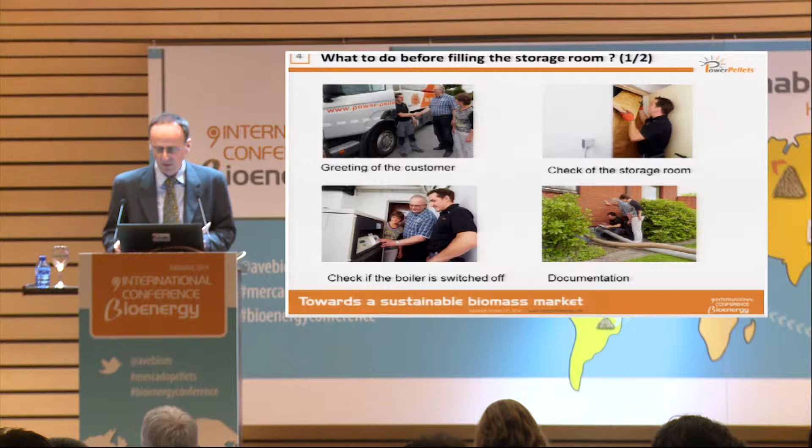For documentation, we have a checklist. A checklist is also in the handbook, the EN Plus handbook, but we have to add some other points, also safety points, so that he checks if there are ventilated caps - the truck driver can also sell ventilated caps. He looks if a sticker is on the storage room, and if he needs to enter the storage room, he has a CO warner on his telephone.

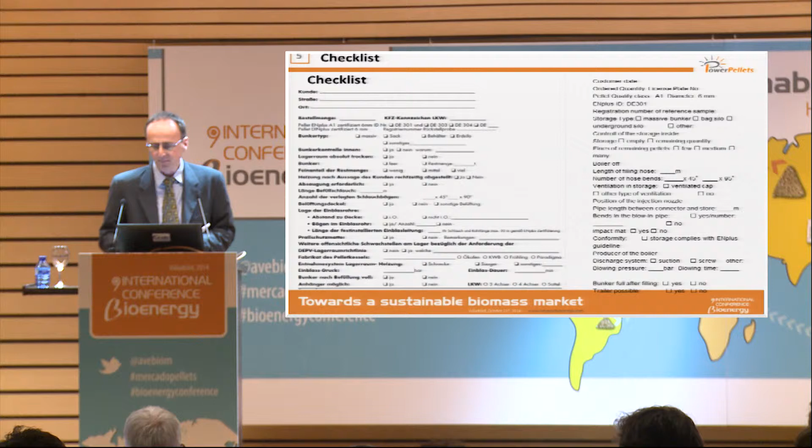We continue with the picture story: 2 tubes and 1 plug socket for the vacuum fan, needs to be 60 ampere. It's also important that the client gets some explanation of what starts, and then the blowing process, the individual blowing process, because every storage at the end client is different.

You get a lot of surprises there, so the driver needs to decide what conveying air, how much conveying air he's using, how much pressure he puts on the silo truck, and what mass flow he has, so that he gets a good result, a good quality inside the storage room. So the driver needs experience and, of course, training, and that's why we do experiments.

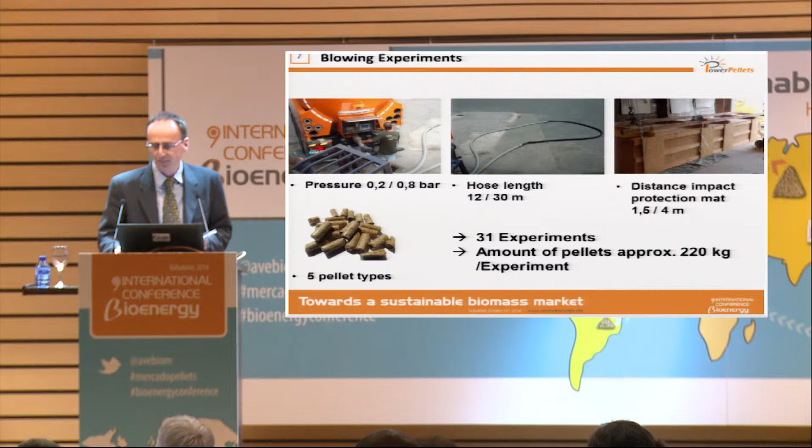And of course, we need to measure the pellets afterwards. If you see, 1 ton is around 1 to 1.5 million pellets. So we measure 7 million pellets before the blowing-in process and afterwards, so that we know exactly what the process of blowing in does to destroy the pellets and how many fines you get.

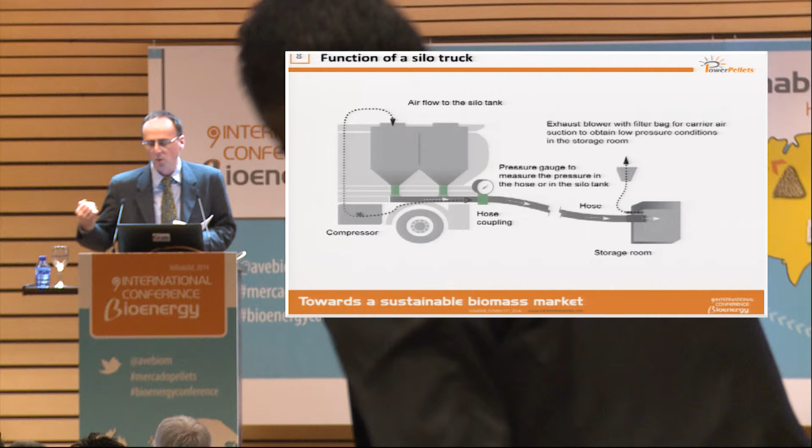Some words on what happens on the silo truck. You have the compressor air going onto the silo and onto the carrier, or the conveying air directly into the tube. The driver decides how much he gives to the silo and how much directly into the tube. Then you measure the pressure and the mass flow.

Imagine this quadrat you see is the storage room of the end client. If we have overpressure of 0.1 bar, then you get 1 ton per meter quadrat. So it's very important that the driver and you as a trader know what happened with the truck in this blowing-in process, that you get no overpressure in the pellet storage, because then you get complaints for sure from the end client if one wall is moved or the whole cellar has fines.

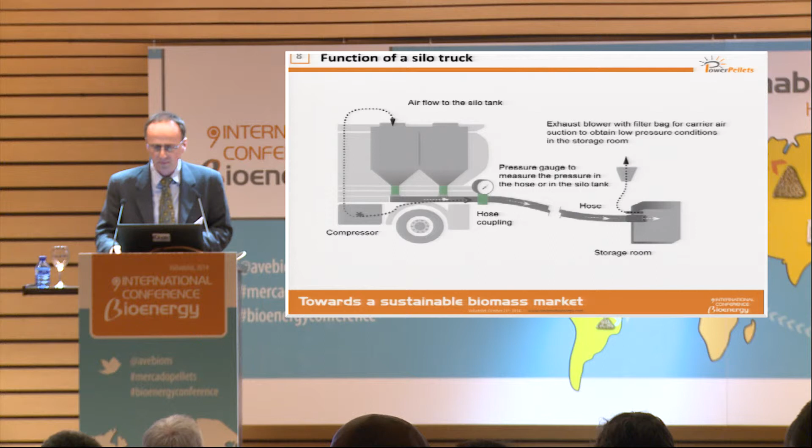We installed this technique at our trucks, and now we have installed it at 4 trucks, but in the next years we will install it in all trucks.

We measure the compressor air, the flow rate, the air flow rate at the compressor, at the conveying air, and calculate the silo air. This is not normal - normally you see at the silo truck only the pressure, but you don't see the air flow.

We measure the pressure in the silo of the truck, and we are recording the weight. The weighing system is connected with the system, so you get it directly compared with the flow rate and the pressure. This data is sent from every client to a web-based server, and some hours later we get the result. This is very good for training truck drivers.

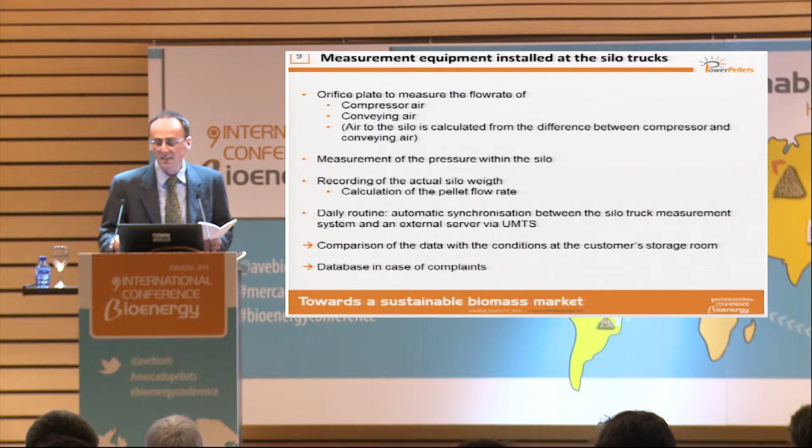And of course, if there is a complaint, we can look inside and see what the driver had done, if it's our fault or the fault of the constructor of the storage.

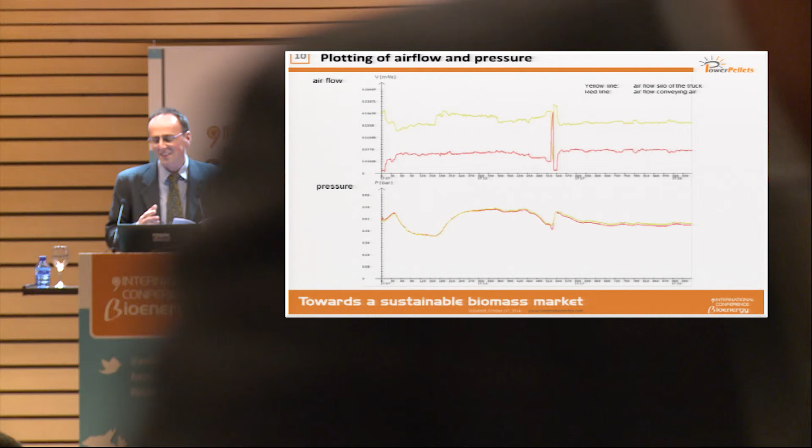For example here, the airflow - you can see peaks where the truck driver tried to move the pellets when they were nearly blocked in the tube, giving some extra air inside. So it's crystal clear what the driver had done, and also the pressure you see directly compared with the airflow.

This has results on safety. For example, if you heat up the pellets with hot air, you get more outgassing of the pellets. You also see the maintenance condition of the truck, the filter at the compressor - if the filter is nearly blocked, then the temperature goes up too.

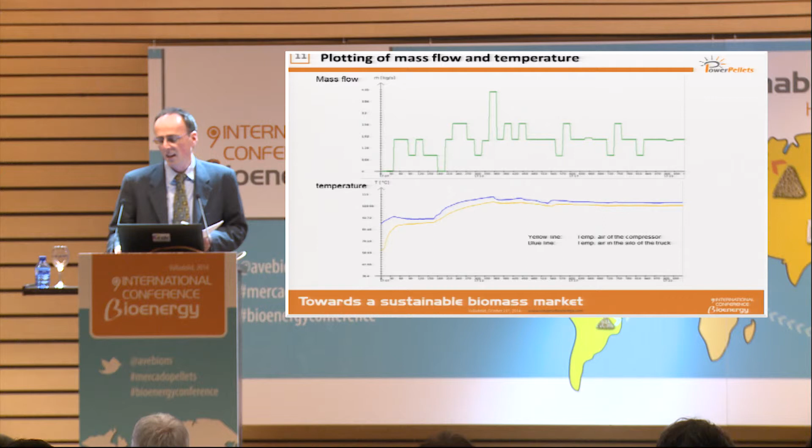In Germany last summer, I think we lost 3 trucks because they burnt, and probably it was the filter. So the temperature of the air is quite important, and you need to pay attention to it.

I'm coming back because now we have the 2 puzzle pieces together. We have the possibility to measure what happened with the blowing in at the truck, and we measured the pellets. So if you look here at the 5 pellet qualities...

The colored part shows what the length is, shorter afterwards. At the ENplus pellets, the first sort, the length was 16 millimeters before and 15 millimeters afterwards. You can also see at the industry pellets, 8 millimeter and industry 6 millimeters - especially the 8 millimeters were already quite short, but they got even shorter.

But if you look at the fines, with a high airflow and a 12-meter length of tube and 4 meters distance of the protection mat, you get quite high fines because with high airflow you blow in the pellets quite aggressively.

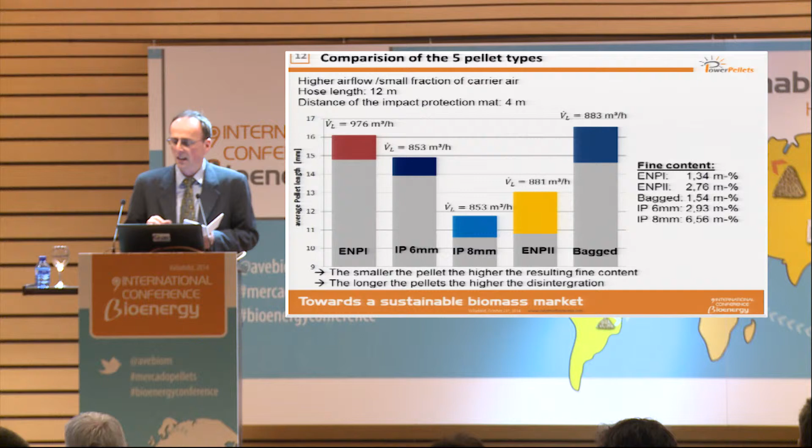So we get fines mainly from the small pellets, because they were already short and break easily. But the long pellets, like the bagged pellet, break in the middle, so you get more shorter pellets but not so much fines.

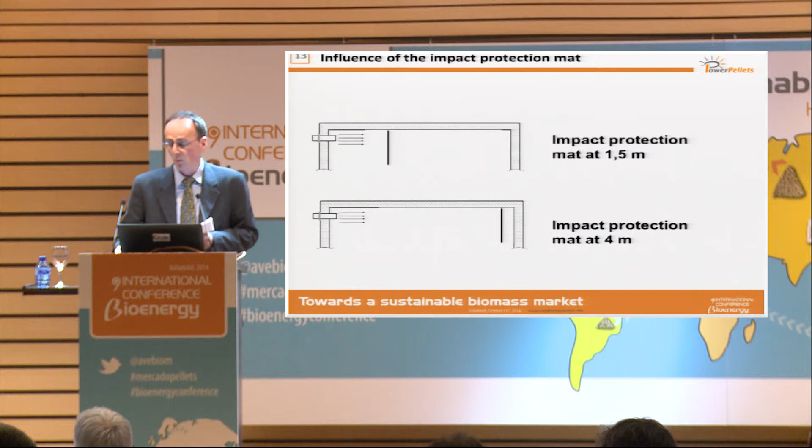A second experiment was about the influence of the protection mat into the storage - one time at 1.5 meter distance and one time at 4 meter distance. And here you see something curious.

The line without the dots is the initial line, the pellet length before. You see the maximum or the median of the pellets was before 16 millimeters. After blowing in and measuring, we get at a mat distance of 1.5 meters...

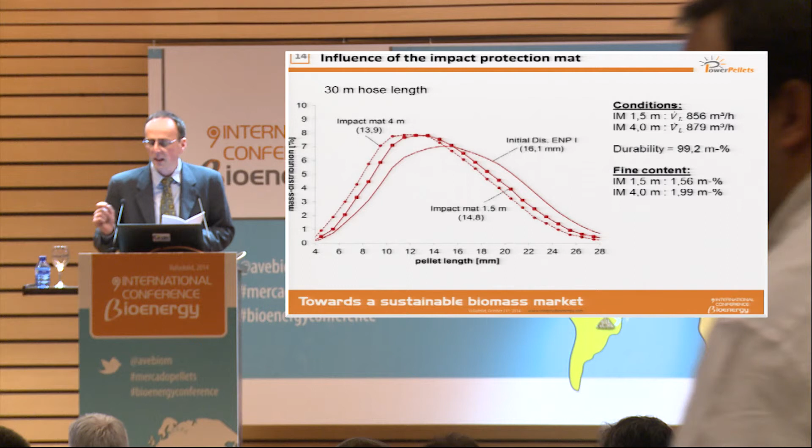That line was not total. Yeah, you will show it. And we have there 14.8 millimeter length, but the pellets with the wide distance protection mat have only 13.9 millimeter.

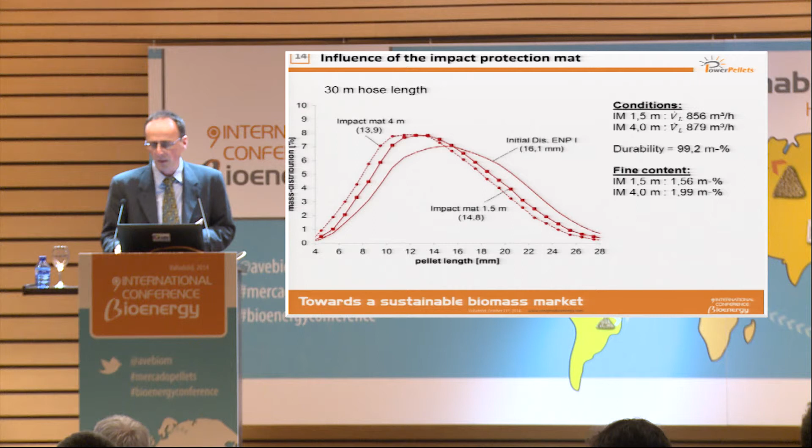And this is not only one example with the 30 meter hose, it was general that the fines with the 4 meter mat were higher and the pellets were more short by this process at the 4 meter impact mat. That sounds not logical.

Our theory is that because we had a block of pellets inside our storage, because we lift up the storage to recharge the pellets quite fast, the mat with the 1.5 meter distance can move to the back. So the pellets are sliding in, compared to the protection mat at 4 meters, which can only move a few centimeters. So it seems that the sliding effect is quite good for the pellets.

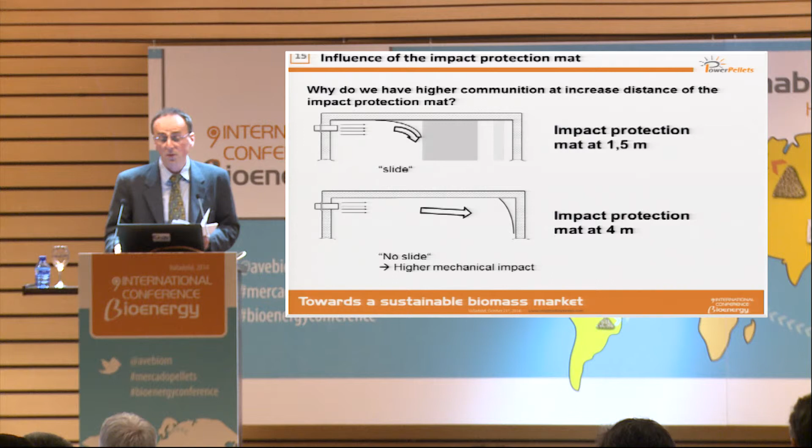Also, it's important that you have tubes with an inner surface which is coated, which is slippy, so that the pellets aren't destroyed by the tube.

About the ground connection, I could speak for half an hour, but I only want to say it's important that you have the ground connection from the truck to the silo, the storage room of the client, and therefore you need to connect the copper wire of the tube to the connectors and so on, so that you have this ground effect.

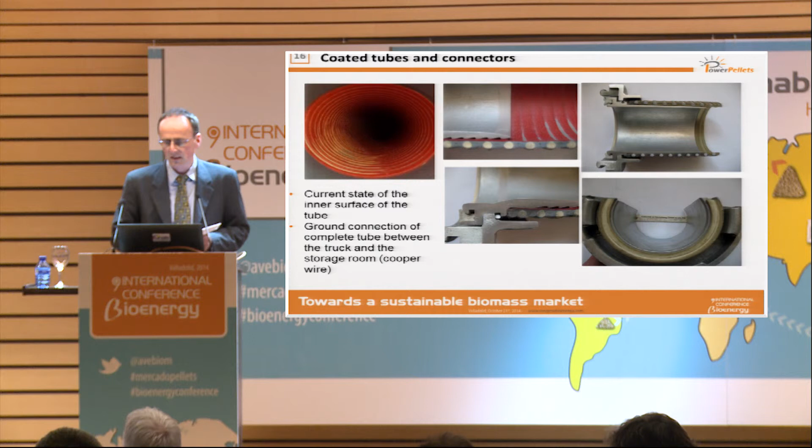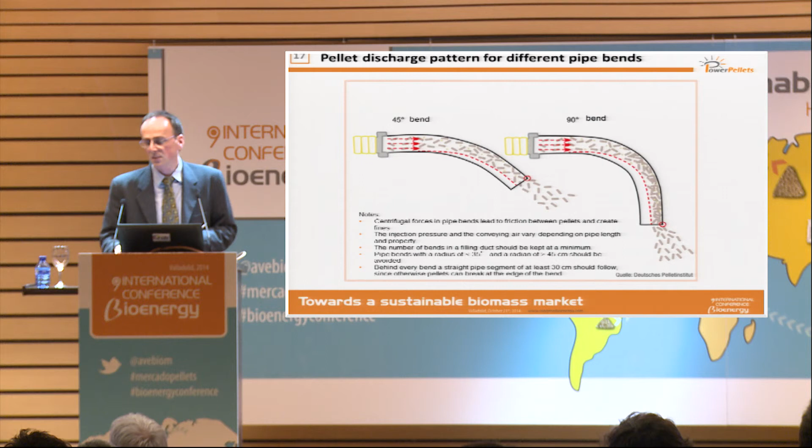And also there, it's not so good if you have connector edges where you get fines. If you look more closely at a bend, you see the pellets going through the outside, so you have friction between pellets and pellets, and pellets and the metal bend. If you have only this bend and no straight part of tube at the end, you get an edge where pellets are destroyed. So you need a straight part of tube behind this little red circle, so the pellets can move through the whole diameter of the tube and aren't destroyed by the edge at the end of the bend.

What we also see is the movement of fines. The fines separate to the lower part, and the pellets discharge like an hourglass.

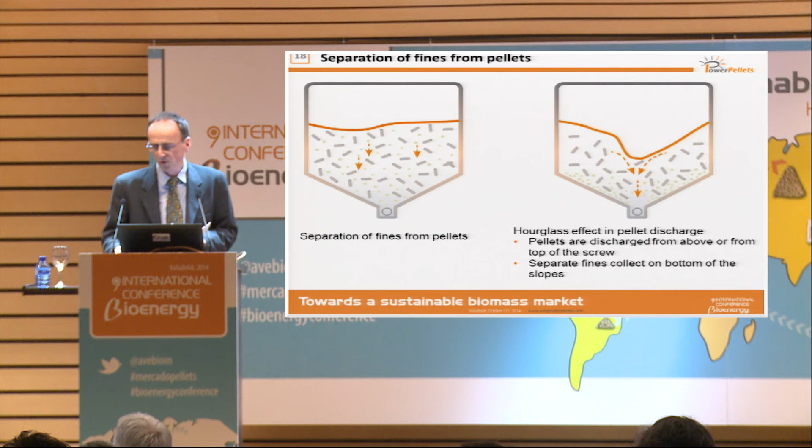And I put here a film. I hope I can start the film. Look on the upper two rows. No, it's not working. Perhaps you start and I say stop. Perhaps you see me? No? You have the same. Thank you.

And there you can see that people think if they get new pellets, the older pellets are discharged. This is not true. If you have 2 tons of pellets in a storage room and buy 4 tons more, a new delivery, you will discharge the new delivery and the old 2 tons stay down.

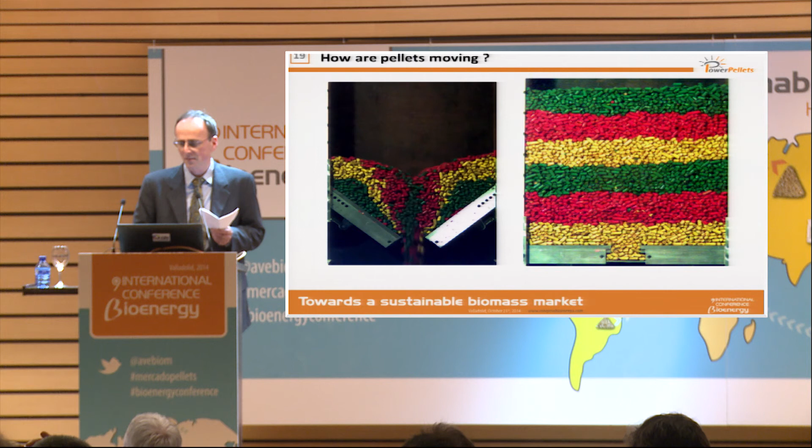And if you know that the fines separate to the lower part, you get a lot of fines down there, and that's why it's so important that the storage room is cleaned after every second delivery. It's nice to see, you know? But I continue. Here also the flat one.

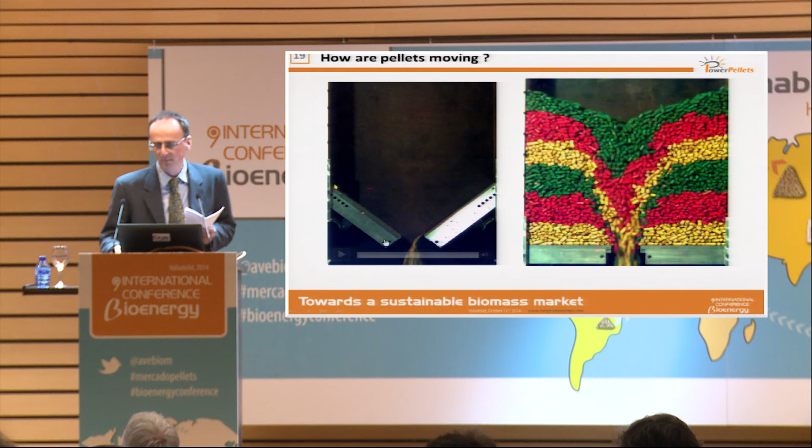Okay, I come to the summary. The driver of the silo truck is the key to having few complaints and good sleep for the pellet trader, so that you have no trouble.

If you have short pellets, you get a high content of fines. If you have very long pellets, 30 millimeters, they will break in the middle and you have a higher disintegration. A length of 1.6 to 1.7 centimeters seems to be the length which is quite stable.

The impact protection mat should allow a sliding of pellets, so that the impact mat can move. The hose length has a significant influence.

I could not show you the results, but believe me, use the smallest possible airflow, because this had the highest influence on pellet quality. And because of the separation of fines, clean the storage after every 2 or 3 deliveries. Thank you very much.